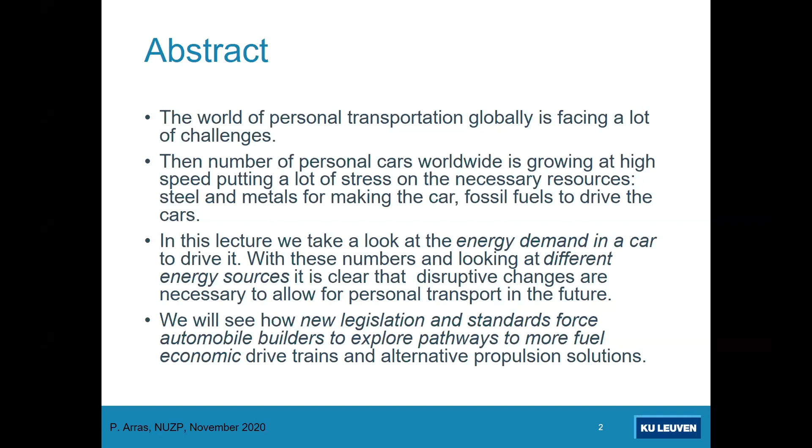So in the overview of my lecture, I will first say a couple of words about my home university and who I am, and then give an introduction on the car as a commodity addiction, about energy resources, battery resources, and some indications for pathways to better fuel economy.

So I work for a university in Belgium. It's KU Leuven, Catholic University of Leuven. It is a very old university, one of the oldest of Europe. It was founded nearly 600 years ago, in 1425, by the Pope.

More or less, it's the biggest university in Belgium. We have about 57,000 students, more or less. We have a lot of staff, academic staff, about 12,000 people working in the university, and another 8,000 extra in the university hospitals, because we have a very big medical branch in the university, as we will see.

KU Leuven is also a very innovative university. We are in the rankings for the most innovative university of Europe. For 5 times in a row, we are number 1.

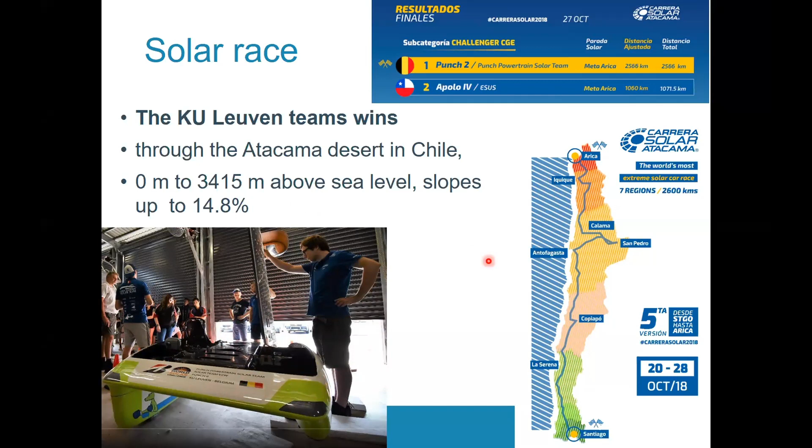Another thing we participate in is Formula Student competition, an international engineering competition in which student teams build and race a car. We race electric cars for over the last 7 years. Students have about 12 months to design and build a car and race it.

All students can participate for master thesis. Specifically, my students are working on aerodynamics, gearbox design, motor casings, battery casings, body, and space frame. So anything concerned with mechanical design is my own students working on this.

So to show that we have experience and a quite good view on the market, let's come to the seminar itself. So why the seminar and what's behind it?

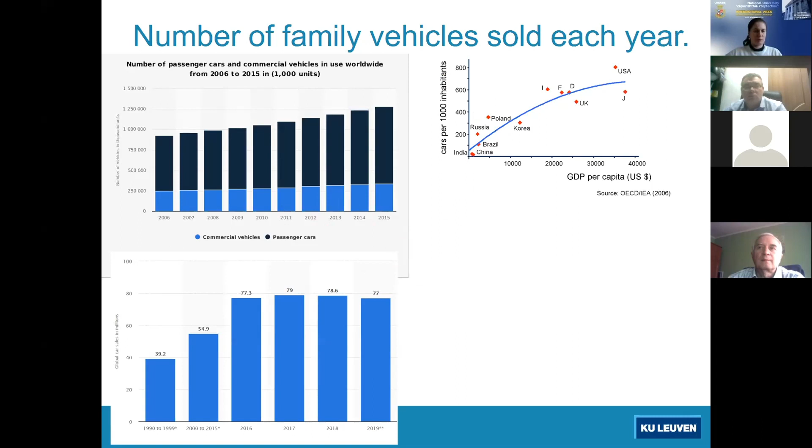This means that there is a saturation in America and Europe, but in other countries in the world, it will still keep growing. And this growth will, of course, take away more fuel and more resources. And there is, of course, a big problem because it puts a lot of pressure on it.

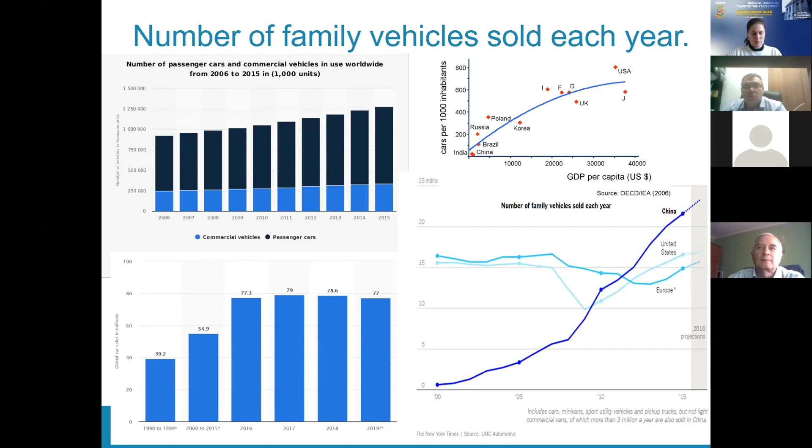So we see here the numbers of family vehicles sold each year, and it grows exponentially in a country like China, while the United States and Europe is stabilized. But this growing amount of cars is of a big concern.

This year is a little bit specific because we have COVID, Corona, which gave a complete drop in car sales. If you look here during the months of this year, we see when there was the first wave of Corona in spring, the numbers of car sales plummeted. And it's very substantial. In Europe and America, there was a fall from 20 to 40%.

More or less between 20 and 40% of sales was cut. But this is only temporary because afterwards, as soon as the first wave was more or less over, people started to buy cars again. So this is only a temporary cut. The number of cars will keep on growing.

So of course these cars need to be made. So we don't only have family cars, but also light commercial cars. This is also growing. And we see here a little dip. This dip is 2009, the financial crisis.

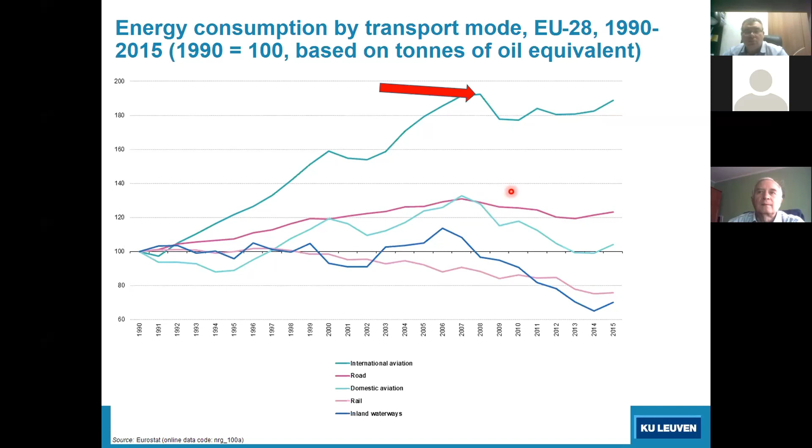So why, with more cars, is there less energy consumption? It's because cars got more fuel efficient over these years, and because starting from the millennium, there was a big promotion of diesel cars, which is inherently more fuel efficient than petrol cars. So the average consumption per car got down, but we have more cars. But this has turned over in the last years.

Besides energy consumption, we also have carbon dioxide emissions, because this is the pollution. And then we see here similar things. We see industry is doing pretty well on energy consumption. They are always blamed, but they have already for many years been getting much more fuel efficient, so that it doesn't show here. They are doing their best.

What's also problematic a little bit, and is also getting better, is residential. This is like heating and so on. It's also much improved with isolation. But transport is on the rise.

In the EU they did a very strange trick because they put cars in the same category as airplanes. So it doesn't show that airplanes are polluting the most per user, let's say.

If we look at the breakdown of CO2 emissions for transport, we see that about 60% of this pollution is created by personal cars, and then another 12% by light duty trucks, vans, heavy duty trucks, and motorcycles.

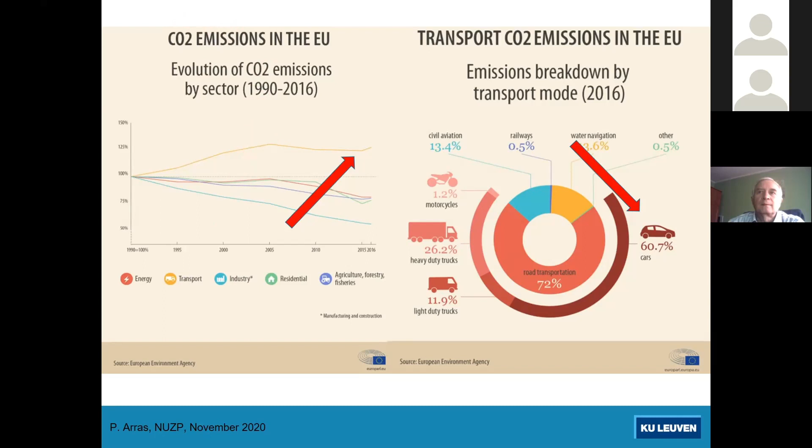A second thing is people want to buy bigger and heavier cars. If we look at the numbers, the SUV sector - sport utility vehicles - has been growing, plus 50, 16, 17, 8, 12%, so more or less plus 12 to 15%. More SUVs than sedans and saloon cars for personal transport, and the bigger and heavier the car, the bigger the problem of emissions.

Another trend set over the last years, and what we see in effect this year due to a lot of legislation, is the number of electric cars and hybrid cars growing. This is a counter movement for carbon dioxide tailpipe emission - not for emissions globally, because they also need energy coming from somewhere. But the number of electric cars is growing all over Europe and all over the world.

So if you look at the transmission system in a car, the powertrain, should we go to hybrid cars and battery electric vehicles, or can we keep up with combustion engines - an ICE, internal combustion engine? Is it a hype or is it a necessity that we will go for a change?

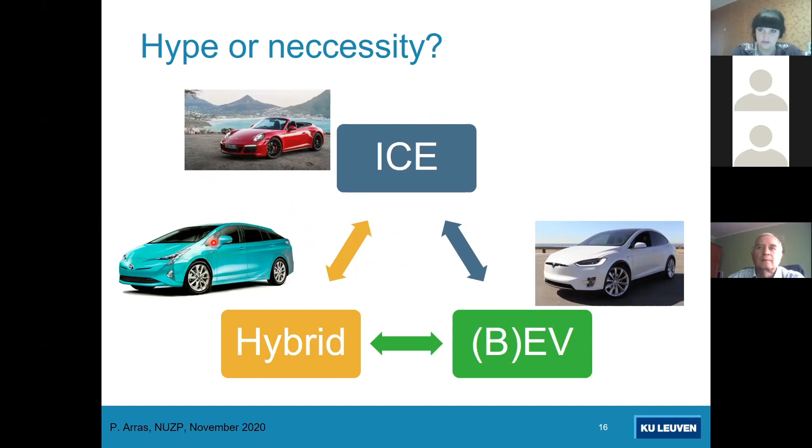So we have combustion engines - there is the oil problem. We have electric systems or combined systems, and in electric systems we also have an energy problem because we need electricity. Where does electricity come from? It also probably creates some kind of pollution problem, and we will have a look at these too.

What's called in advertisement a zero emission vehicle is not so zero emission, because electricity has to be made and batteries have to be made. So they also produce some environmental problems in this.

The resources for batteries and electric cars, also the charging problem, we cannot oversimplify. The conclusion is not that it's not useful to do it - the conclusion is we should be careful not to oversimplify things and think about the consequences of each of these things.

So if we speak about a zero emission vehicle, like an electric vehicle, zero emission means that where the car is, when you drive the car, there is zero tailpipe emission - there is no tailpipe where carbon dioxide is coming from.

But it can happen that this emission will be in another place. For this, I looked at a nice website which you can check out. You see, for every country, you can get the numbers of how much carbon dioxide is the indication for each of these countries. I took Ukraine a couple of days ago and looked at this.

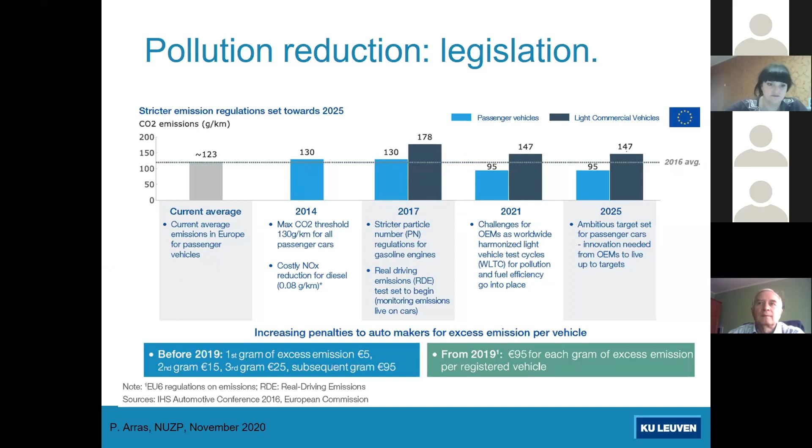So there's a problem with traditional cars. We need to get to more electric cars and hybrid cars. And what is now changing in 2021, as I told you, is the penalty mechanism.

What does this mean? Well, for each constructor, car builder, they measure the fleet average of carbon dioxide. They take all the models and measure how much it gives. Then for each gram on the average that is more than 95, they should pay per car which is registered. So for instance, if your average is like 100 grams of carbon dioxide per kilometer, that's 5 times 95 euros, which is 475 euros per car that you sell.

In this projection, made by JATO, an international organization which makes statistics for cars, it's said that for the Volkswagen Group, they are missing about 26 grams per kilometer. So it's 125 there at the moment, and the penalty per registered car is 2,500 euros.

And they built 3.5 million cars, more or less, in 2018. This would mean a penalty cost of 10 billion euros. So here you see the penalty mechanism. And of course, this is driving all of these constructors to get this number down. That means you need to sell electric and hybrid cars so that the average of your cars is going down and that you avoid this penalty.

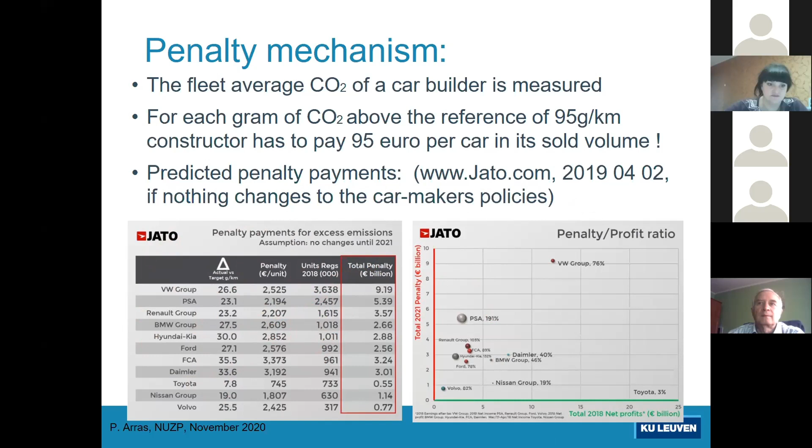So what are the solutions to avoid these penalties? Well, make more electric cars, make more hybrid cars, because they keep the average carbon dioxide exhaust low. But also make more fuel-efficient cars. And what comes with it, we should go back to more lightweight and smaller vehicles.

And what is also done, if you follow the car market a little bit, there is a series of cars which are dropped because of this legislation in Europe. Audi, for instance, they cut from their portfolio like the Audi TT and R8. They will not make it in the future because they don't sell many vehicles of that kind, but they raise the average carbon dioxide level of the constructor to higher numbers, so they will be cut out, not replaced.

And other constructors like Mitsubishi, they announced that they will not introduce new models on the European market and the UK market anymore, except for electric cars. Because if not, they also have to pay the penalties with a new car. So it brings an avalanche of changes, disruptive changes in the world of making cars.

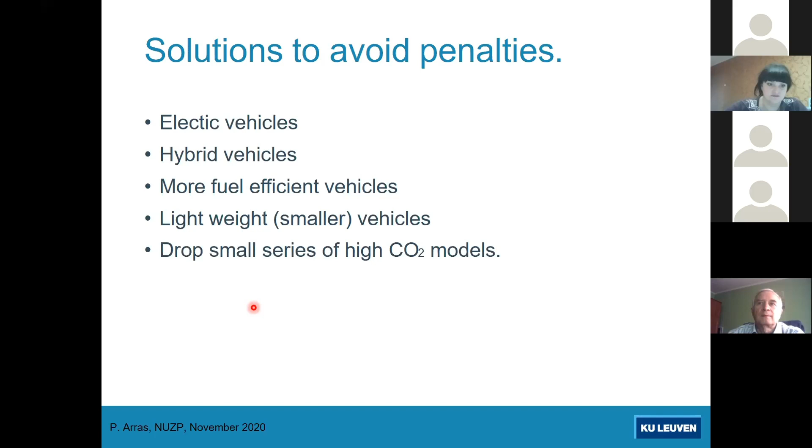And there are examples where it works. If you look at Norway, already for many years they promoted electric cars and so on, and they have very strict rules. Their target in 2020 is already 85 grams per kilometer, which is 10 grams per kilometer less than Europe in 2021. So they are front runners, and they promoted a lot of electric cars and hybrid cars.

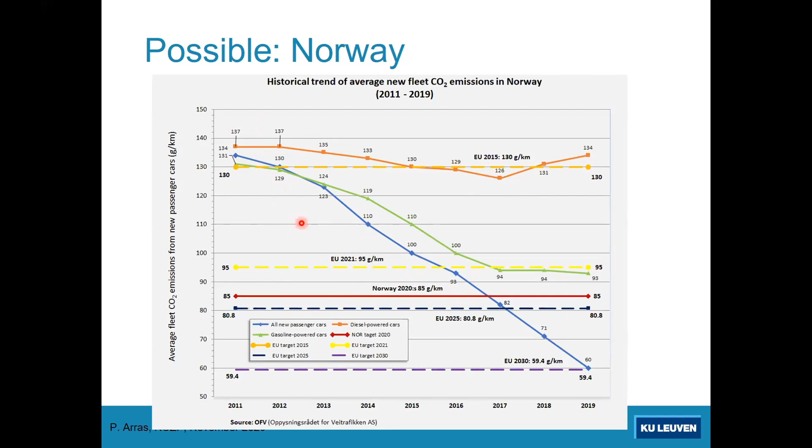And we see the numbers here. We see the diesel powered cars going down a little bit and returning a little bit because diesel is pretty good in the carbon dioxide thing. Gasoline powered cars, that's the green line, is going down too, because they don't want this.

And then we see here the projection - in Europe in 2025 is the next step, then we go to 81 grams per kilometer, and in 2030, 60 grams per kilometer. So it is pretty problematic. But in Norway, they succeed because already in 2019, they're in this region.

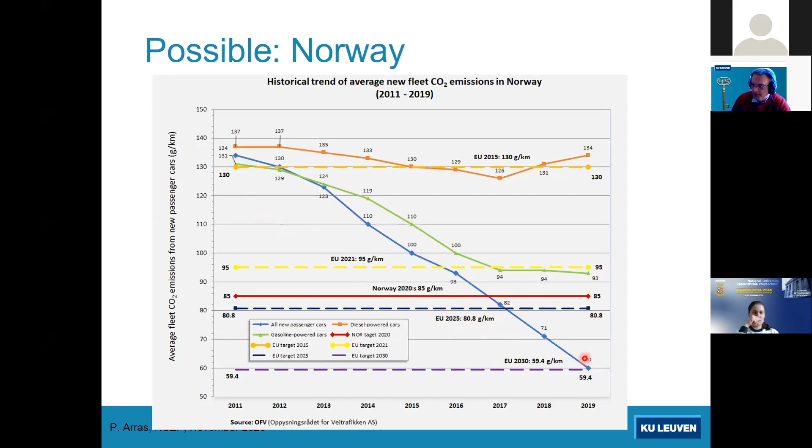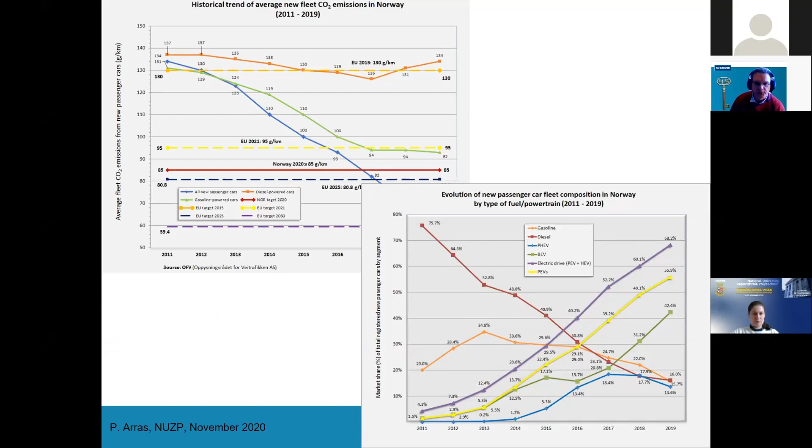So as a result, we've seen this year on the European market and worldwide an amazing amount of new cars with plug-in hybrid cars and electric vehicles, all to bring down the average tailpipe emission. It's not necessarily because these car manufacturers want to build these cars, but they are forced by legislation and by the market. Maybe the best example of this is the Volkswagen ID3 and 4. Volkswagen was forced to do this because of the heritage of the Dieselgate, which they initiated. So they wanted to be front runners again, and they have to build a good electric car for mass production.

This is from Citroën DS. This is a Polestar, Volvo Geely, Volvo, whatever you call it. These are all new types coming on the market, and next year they will have a lot of success.

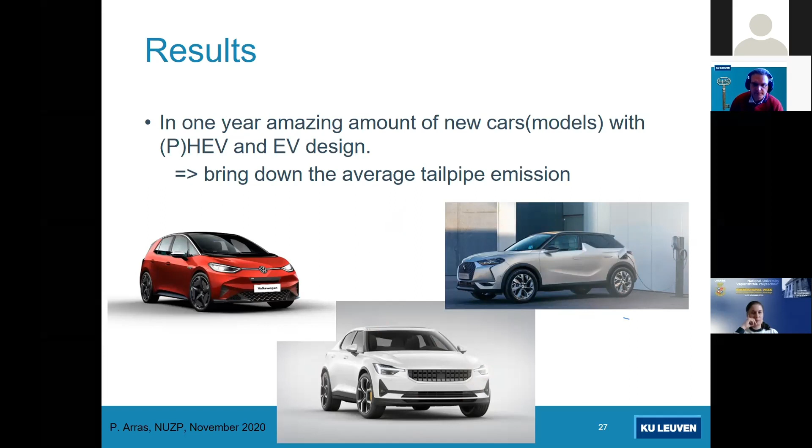A number of problems arose also from the way cars were measured in the past. If you have a car, in the book it's written this car uses like 5 liters per 100 kilometers, and in reality it uses 8.

This comes from the test cycles. So up until 2020 we used the NEDC, the New European Driving Cycle. It's not so new, it's from the 1970s. Now we start using the numbers coming from the WLTP, the Worldwide Harmonized Light Vehicles Test Procedure, which gives much more realistic numbers because the test has been altered a little bit.

On this NEDC test, Dieselgate was based. Volkswagen tweaked this test to get lower numbers than in reality. So there is a difference in the test now: it's longer, takes more kilometers, the average speed has gone up, so it's closer to real numbers, test temperatures have been altered, and a lot of other things too.

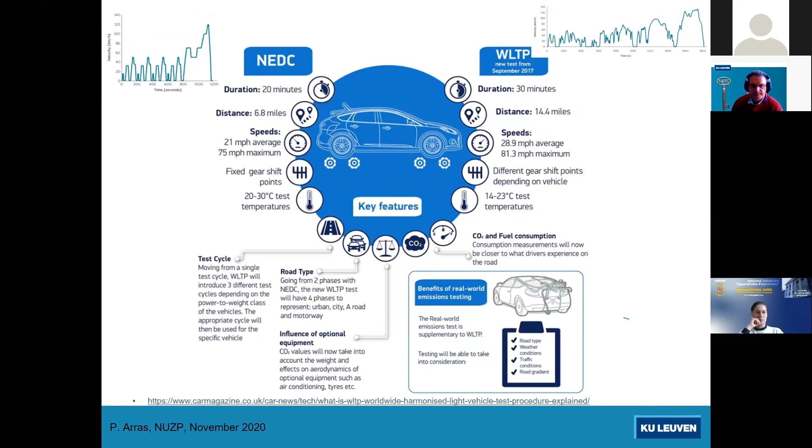So what is the future directions in automotive engineering? We don't know. We can think about it, but there are a lot of aspects.

How will the car of the future look like? In car design, every 10 years there is a new style of cars. In the 1990s, everything was round. Now everything is quite boxy with sharp edges. How will it look in the future?

Coming together with other things, if you have a self-driving car, you can rethink the car design entirely. No steering wheel necessary anymore, and technology like Segway technology with 2 wheels only instead of 4 wheels could be possible.

What will the roads of the future look like? If the roads and other infrastructure are better, the car could be more fuel efficient. If we have self-driving cars, the road can be narrower. We don't need as much space because cars will hook up and drive next to each other like a train, so you need less space for more cars.

What kind of energy source will be used? Electricity, fossil fuels, but maybe also hydrogen and others. How clean will the car be for the environment? How much will it cost or be allowed to cost?

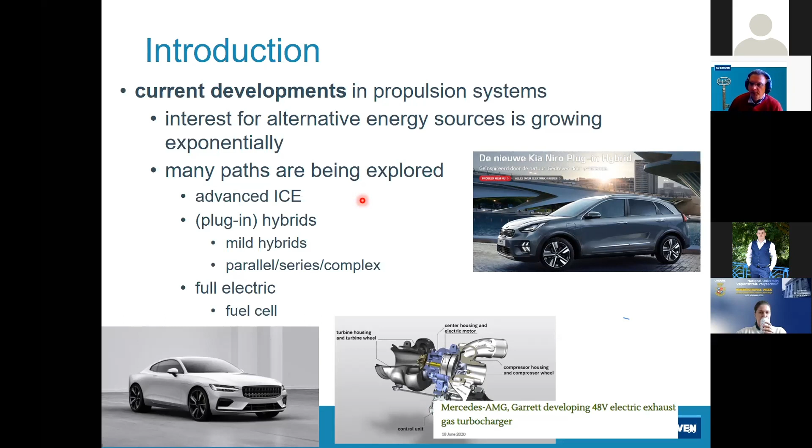So we'll see a little bit further on. For instance, Mazda is a big constructor. They make brand new engines, spark-controlled compression ignition engines, very new. They have electric cars coming up, and hybrid cars coming up with different technologies, with batteries or with ultra capacitors, and so on. There are a lot of things moving.

Mazda, until about 2 years ago, was a performance car builder. They build a car which looks like a normal car for standard transport, but hidden in there is a big engine with a lot of performance. That was always their trademark, and now they also need to converge.

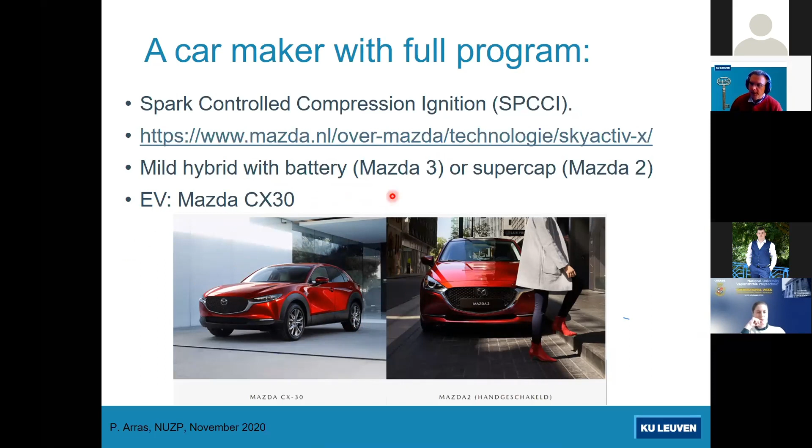So if we want to work on this, we want to work specifically on the fuel economy of the car. This is the big driver, because the primary energy sources will stop.

Predictions have been there for many years, but the date of when fossil fuels end has shifted a little bit over time. More or less everybody in the field agrees that by 2070, which is about 50 years from now, all the oil will be gone in the world.

That's a kind of optimistic prediction. Others say it's less, so 50 years is far away. But this means that within now and more or less 20 to 25 years, fuel will be so expensive that most people will not be able to afford it.

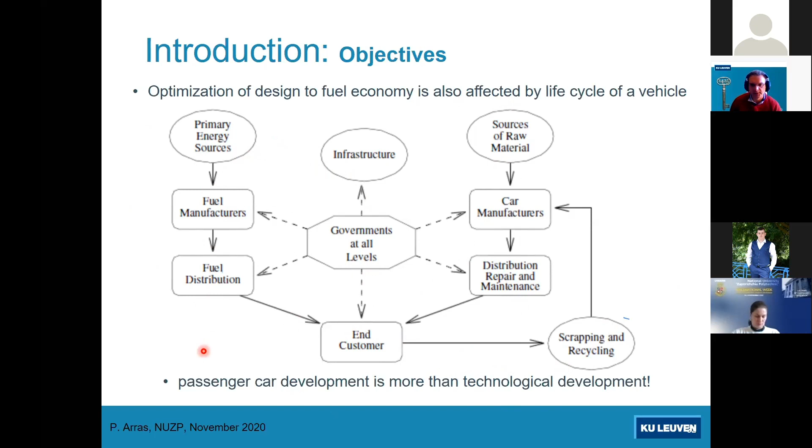So development of cars is much more than just technological development, which we look at as engineers. The number of stakeholders and players who define the car, who define the design of the car - there is a lot of things, a lot of people involved there.

So if we want to look a little bit at better fuel economy, in engineering aspects, we can improve technology a lot. What technology is necessary and available, and what's the implications for the user, the manufacturer, and the maintenance. We can optimize design - how can we design our powertrain for the best fuel economy and other things.

Because we want to keep up with some performance. Maybe it's not always important, but we have to do this. Drivability means how comfortable it is to drive the car. Safety demands - we also want the car very much to be safe. We want airbags in there, but airbags have weight. So if you have extra safety demand, your car will be heavier, and that means more fuel.

And the impact on the cost is also important - cost of production. So car manufacturers cannot always go for the best technology and the best scientific advance, because your car, in the end, you need to sell it. It needs to be commercially viable, meaning you need to be able to sell it to people. You have very good cars from some points of view, like the McLaren.

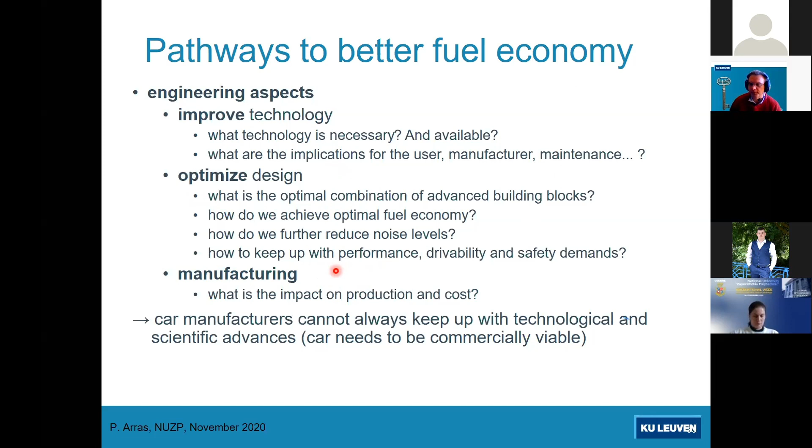McLaren cars built with Formula One technology, with carbon structures and so on. It is the most fuel efficient car if you look at how much fuel you use to get how much power from the car - that's an engineering aspect, very fuel efficient in that way. But it's not fuel efficient to drive that car, because fuel efficiency only gets there when you go to the top performance of the car, and mostly you're not driving around in the streets at 250 kilometers an hour. So it's useless in that sense. There are these different aspects.

So if you look at a car, we use kind of a standard car. What's the demands? We want an autonomous car which can drive and is not depending on a fixed power grid like a train or a tram. The refueling time should be low, we should be able to drive some time between refuelings. It should be able to transport some people and some payload, accelerate in a comfortable amount of time to 100 kilometers an hour, and we should be able to drive up a hill. This is customer demands.

But here is a problem. If we want to accelerate a lot, it means a lot of power in the car and a lot of fuel consumption. So maybe we should also rethink society and the demands for a car.

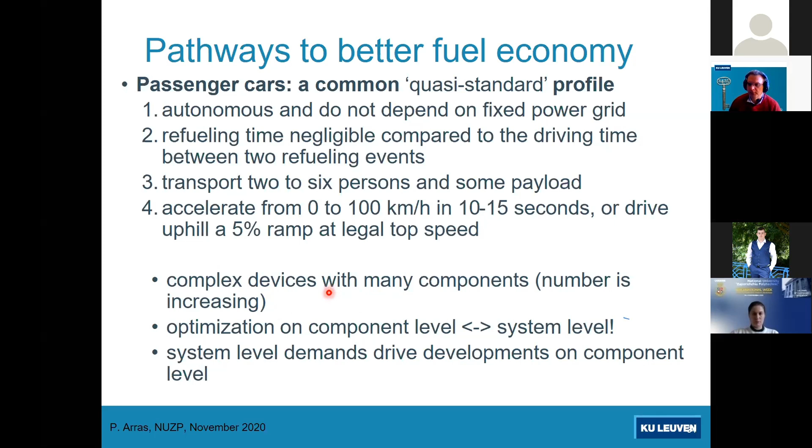And a car is a complex device. If you open up the hood of a car from the 1970s, it's empty - you see a small engine or a big engine, and beneath the engine you see the ground, the road. If you open a new car hood, you don't see anything, you just see technology sitting there. So it's a complex device - there are many components, and it's hard to know where to optimize to get the best result.

And if we have a look at the energy system, we come from primary sources, fossil sources like oil and gas, nuclear and sustainable sources, so wind and solar energy. This gives the well-to-tank efficiencies and production process.

Now we have well-to-tank. Our energy is stored on board of our car in a battery, in hydrogen, in a fuel tank. And then we convert it to the car. This is the engineering aspect, we convert it into mechanical energy to drive the car.

So then there is the energy consumption of the car. The car drives, but then you have the energy consumption, this is set by the driver. And we have energy waste if we brake - we make thermal energy, the brakes heat, this is a loss.

The tires wear out, the engine drag, and the way a person drives the car. If you always want to accelerate a lot and want to drive maximum speed, your fuel economy will go down - you use more liters per 100 kilometers. So that's all there. If you look at engineering, we can only control this process.

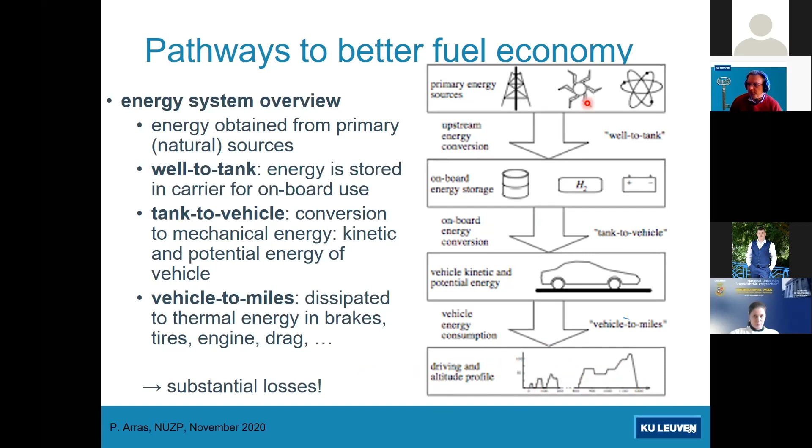So everywhere there is losses, of course. If you see fuel economy, there is a lot of things which can influence it - from the driving profile, speed, acceleration, and drivability, what does the driver expect from the car. From the vehicle, mass, rolling resistance, aerodynamics, size of the car, because this comes a lot with mass.

The gearbox, the engine, the fuel itself, and then the energy availability we already talked about, and distribution loss - how much energy is lost when you distribute fuel. At a petrol station, the ground is always soaked with diesel and petrol and smells - this is distribution, to name one. But the same exists in electricity and so on.

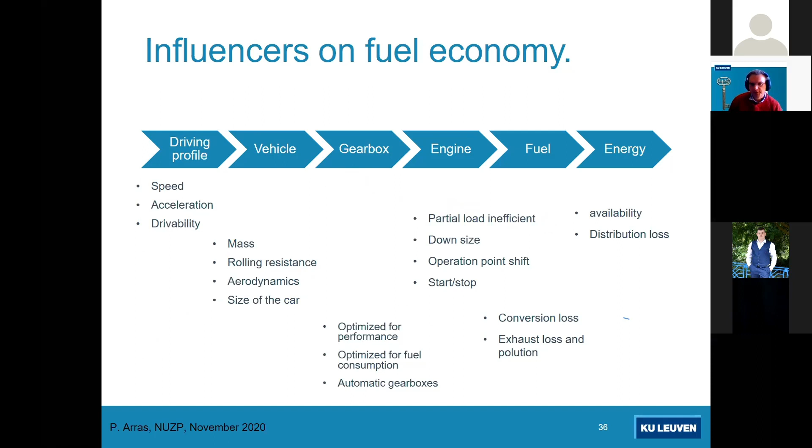So there is a lot of things, and automotive industry is working on this, but it's also very important because in Europe, automotive industry is about 2.5 million jobs. So that's also a political problem because politicians don't want to go too much against car industry, of course, because these are their voters who work there.

So fossil fuels are depleting, not only oil, but also the rest. So for nuclear or for electricity, we can use other sources too. I'm not sure if I'm still in time.

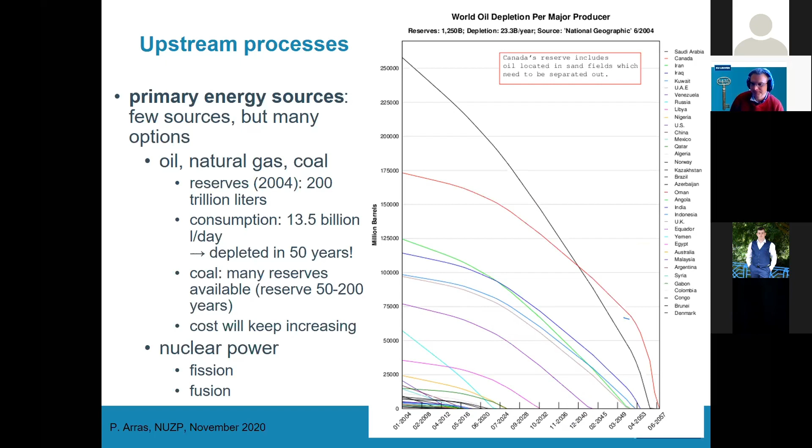There are also renewable sources: solar power, hydropower, wind power, and so on. This is also explored, but one issue is the investment needed. Second is the possibility - for hydropower you need a country with some height difference. You have in Zaporizhzhia a nice dam, that's a difference of 40 meters. But if you look at Belgium, most of it is below 50 meters above sea level, so it's tough for us to find a height difference. Wind is also a possibility, but a windmill is big, takes a lot of space. Solar panels take a lot of energy and precious metals to build. So there are some restrictions in using this.

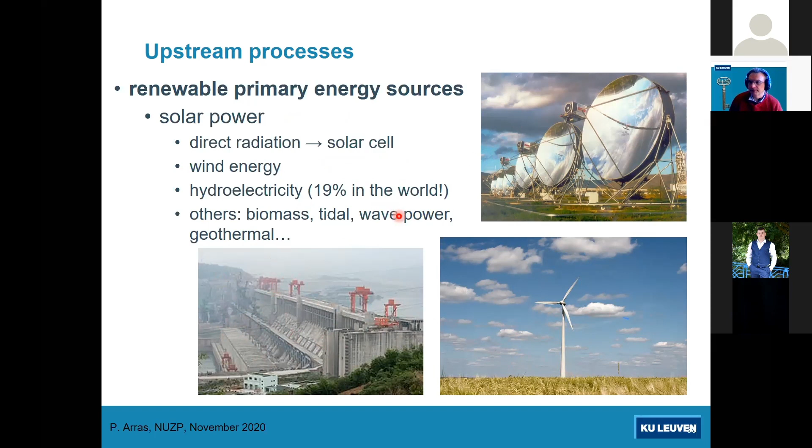At the point of upstream processes, we have to convert it to something we want to use. Oil needs to be converted into diesel and gasoline. We also have alternatives like biodiesel, methanol and alcohols. And then there are alternative fuels: hydrogen, methane gas, compressed natural gas. And we have batteries as an energy carrier.

And what do we want? We want high energy density, meaning a lot of energy on board the car to get a big range to drive far. We want higher power density, meaning the power should be released in a short time, to make acceleration and drivability possible. We should be able to refill simply and fast. We should have an energy source that is low on environmental impact and low on infrastructure needs. So there are a lot of demands.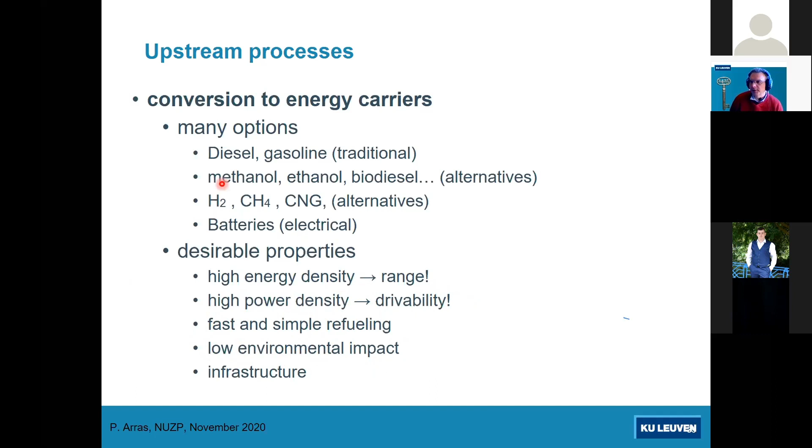If we recalculate what's there, we can do this. If we look at the bottom, we have a formula. This formula applies for a vehicle. We won't go into deriving this formula now, but if we calculate it, we see for a standard vehicle - more or less a mass of 1,500 kilograms, a typical full car like a Ford Mondeo or something in that range, a modern car with some aerodynamics - we get this power demand. This means we need something like 50 megajoules to drive 100 kilometers.

And we see aspects of aerodynamics - that's the first term, size and aerodynamics. The second term we see depends on the rolling resistance of the car and its mass - this is resistance. And in the end, we have acceleration, where the mass of the car is very important.

If we recalculate all the way down how much energy we need, and if we have to convert it starting from oil for instance - we have to refine it and transport it, then convert it to mechanical energy - we come with a diesel car to something like an efficiency of 20%, meaning only 1/5 of the energy stored in the oil is used to drive the car. Everything else is wasted. For a spark ignition engine, so a petrol car or CNG car (compressed natural gas car), this runs at something like 15 to 17% only.

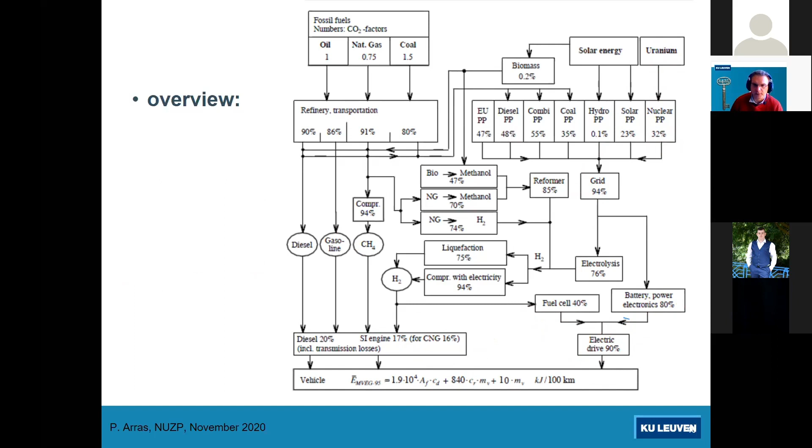And if we recalculate how much carbon dioxide we then generate doing this: if we use a diesel car, we get about 21 kilograms of carbon dioxide per 100 kilometers. This is more or less what it means. If we have a petrol car, gasoline, for the same car and efficiencies, we come to 25 kilograms. So that's an increase of about 20%.

If we use natural gas, we come to 20 kilograms. So diesel and natural gas cars are more or less the same for carbon dioxide exhaust. This is the reason why diesel was, a number of years ago, very successful in the consumer eco lines - blue tech lines from constructors and so on were all based on diesel. They lost it with the Dieselgate, because there was a problem with other exhaust gases.

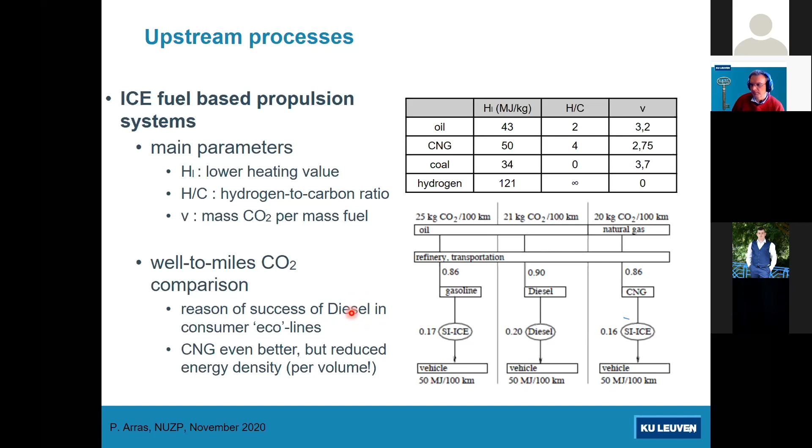Okay, if we look at an electric vehicle with the same vehicle, and we go to nuclear, it generates 0 kilograms of carbon dioxide. Yeah, so that's very good. If we make electricity with natural gas, we have about 8 to 10 kilograms of carbon dioxide. If we do it with coal, we generate 29 kilograms of carbon dioxide per 100 kilometers.

So if your electric car uses electricity made by coal, you have these huge numbers, these big problems of carbon dioxide. These numbers are a little bit different from the website I showed before because they calculate a little bit different thing. So we cannot just compare the website and this number, because the calculation is a little bit different.

Okay, but this is interesting numbers, of course. We should be careful to see how the energy mix is to make electricity, to find out if it's okay or not to use our electric car.

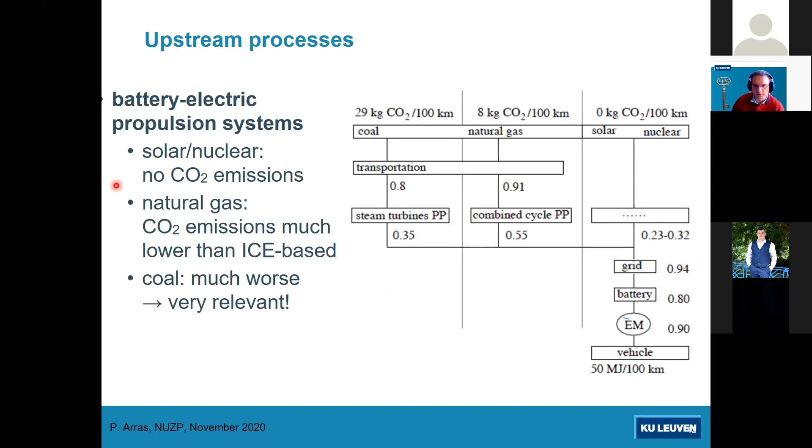And if we charge it from the national grid with a mix of gas and so on, if we look at a gas-fired power electricity plant, then we generate about 160 grams per megajoule. And if we then recalculate it, we come to about 100 grams carbon dioxide per kilometer for this electric car.

And so that's in the same range as what is in the leaflets from traditional cars. But here is taken into account, of course, also all the losses before. So losses come from getting your primary energy source, converting it, producing it.

This is production, getting it through the wires to the home and to your car and driving. There is a lot of losses here. The amount of losses, for instance, between your house and the power plant, in Europe, in the power grid, this accounts for a loss of approximately 10% of your electricity.

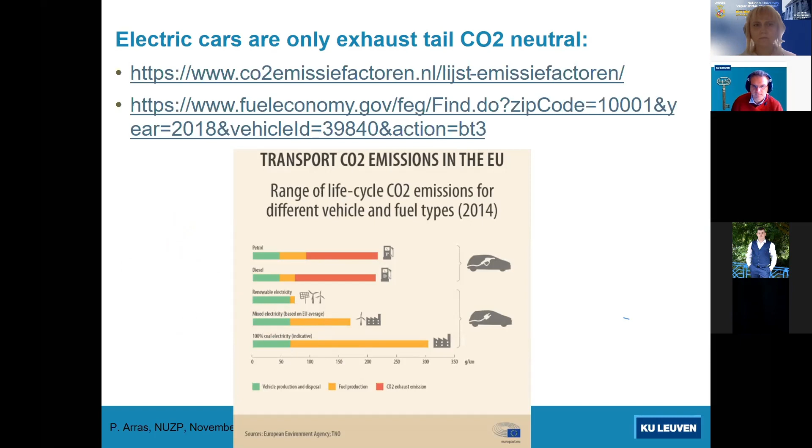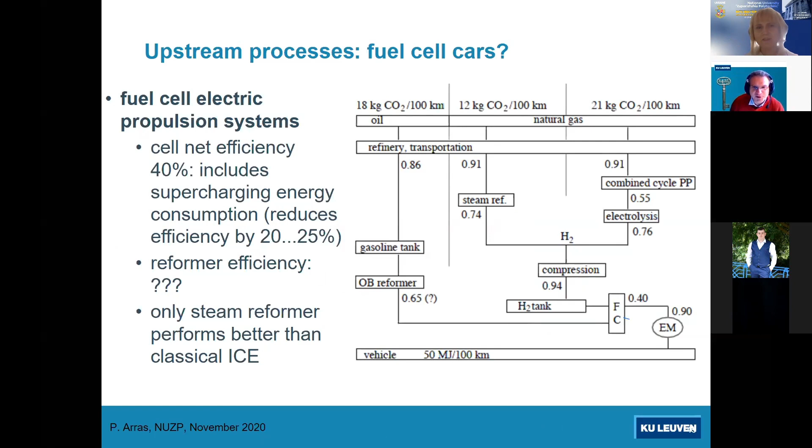Okay, there is other cars too. It's already time - do you have a lot to cover? Yes please, I have about 30%. Just like to finalize. Just a second. Sorry to disturb you. No problem. I will be rounding up.

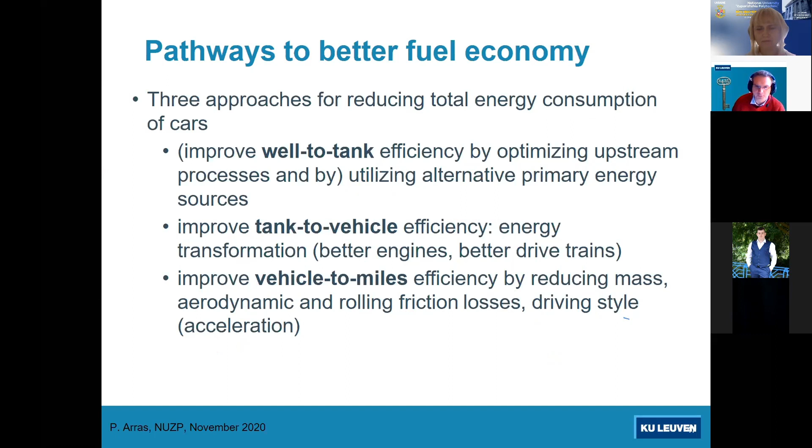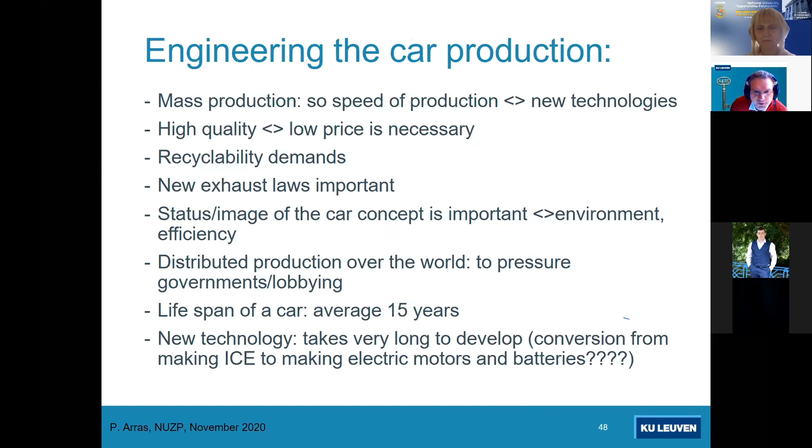So if you want to go to better fuel economy for cars, we should improve energy consumption in the cars. This means improving tank to vehicle efficiency with better engines, better drivetrains, and especially improving vehicle to mile efficiency by getting a better idea of how to use the car. There is a lot of things about it, but I just want to say maybe we need to rethink a lot.

So is there a future for personal transport, and for things to be solved? Yes, there is, we can work on it. Especially for city cars, we should go on the road for electric cars. We should go for downsizing all cars, make them smaller, more lightweight, so they don't use so much resources and fuel. We should go for autonomous driving, because a computer is much more stable in getting fuel economy than your foot is. We can go for shared cars. We can change the mentality of people toward expectations - we don't need a car with 200 horsepower just to brag in the pub and say my car is bigger than yours. It's not necessary when you drive a car.